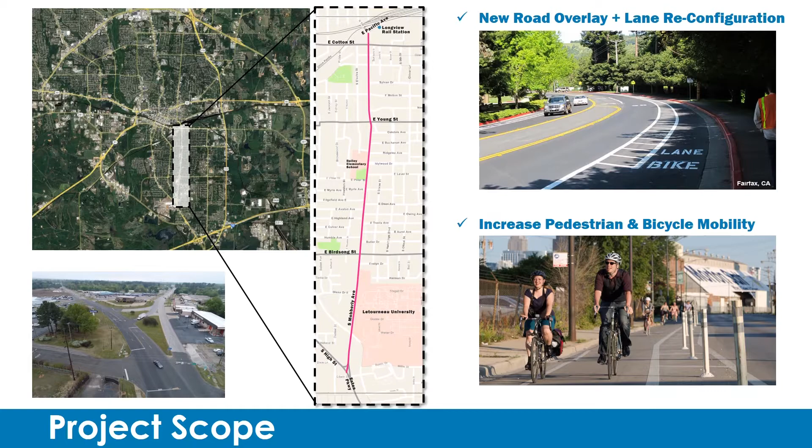The whole purpose of this is to make sure that we are creating a road that is safe, that is more pedestrian friendly, that is more walkable. So those are our project goals.

This has been a long time coming. If you haven't known that, this is a project that has been in the works for quite some time now. Back in 2014, Kevin over here, one of my colleagues with Freese and Nichols, who's going to be talking about some components of this, he actually did a pedestrian access study looking at how to improve the pedestrian access, particularly with the transit centers in those areas.

Again, I was lucky enough to work on the comprehensive plan back in 2015, which was a guiding plan that the city did, quite a large effort.

We followed that with a small area plan that specifically focused on South Longview. One of the real key things that came out of the comprehensive plan was that South Longview needs a little love and attention. We've seen a lot of growth going to the north, but we really need to do some things in this area. So that was a real key focus that came out of that, and a significant thing that helped lead us to how do we improve this area and the infrastructure to hopefully encourage new investment going forward.

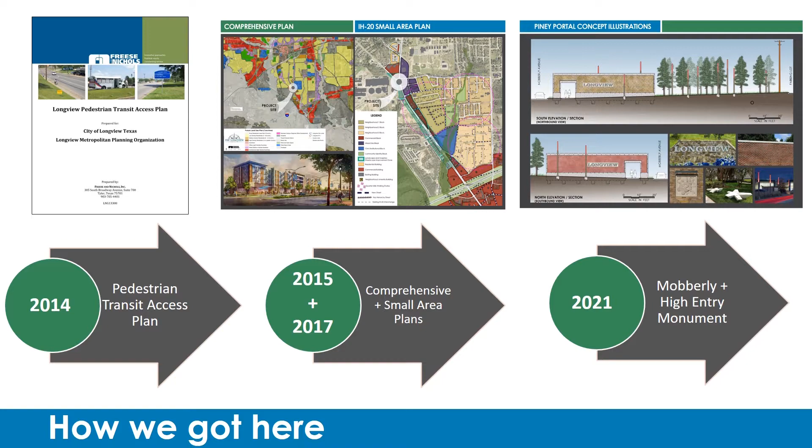And then the other project that also came out of this small area plan was a new entryway. So it's not there yet, but it is designed. Hopefully by the end of the year, the design will be complete and all the hurdles that we've got to go through to do that.

And then next year, you will start to see a new entryway right at where High and Mobberly meet. There's going to be a great new sign that goes there and a little reconfiguration of that roadway. So again, there's exciting projects underway that are coming.

And then also, additionally, you passed a bond. You as citizens of Longview passed a bond to put forward this as a project to be able to complete. The good news is that the funding is already there. We've already approved it, so yes, this is going to happen.

We are going to make this a better street, and that is going to be moving forward. We've also helped the city apply for a TxDOT grant, and so that will allow for some additional dollars if we're so lucky to get that, to be able to do some improvements.

So while I mentioned this project has been going on for a while, we are at the beginning stages tonight of actually designing this roadway. There are 2 meetings that will get that early input, and then we'll have some meetings throughout the construction. The actual construction of the roadway is probably 2 years away. We're going to be in design for the next couple of years and doing all the work that we need to do. So it might be 2 years away, but it is the time to make sure we're giving input now as we move forward with those designs.

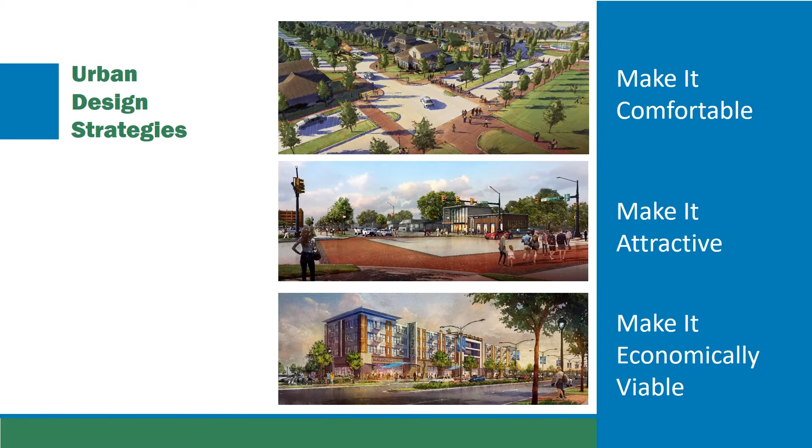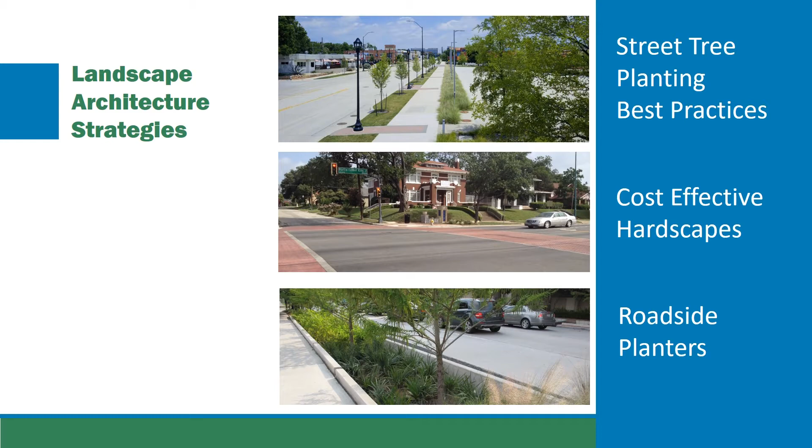The purpose of this is to make it comfortable, to make it attractive, to make it economically viable and encourage new development, and then also just to make it safe, looking at landscape opportunities, to make it green, to make it pretty, to look at those things that enhance this corridor from different planting options.

So when we look at the project goals, there's a lot of things that have come to mind as we've been hearing about this project: making it walkable, making it more of a destination, looking at art or safety enhancements, and hoping that we can ready this for economic development and make it sustainable.

So with that, you're going to hear the term complete street a lot. That is really our goal. Kevin is one of the complete street experts. He goes around the country talking about complete streets, so I'm going to let him come talk about what that is.

Thank you, Wendy. All right, so what are complete streets? Why do we do a complete street? What do we think of it? The beginning of the impetus for complete streets is the fact that we have focused so much on traffic, and moving traffic efficiently and effectively, that we've forgotten about the other road users, the bicyclists and the pedestrians. So we go back now and revisit the investments we have in our roadway infrastructure and see if there's some kind of balance that can be struck with what we have versus what we need.

We look at the roadways, and we look at a 5-lane road like we have here on Mobberly, and we think, do we really need 2 lanes each direction with a center turn lane, or can we do something with a little bit less, introduce bicycle-friendly bike lanes, enhance the sidewalk provisions, and make this more of a balanced corridor that is usable by everybody.

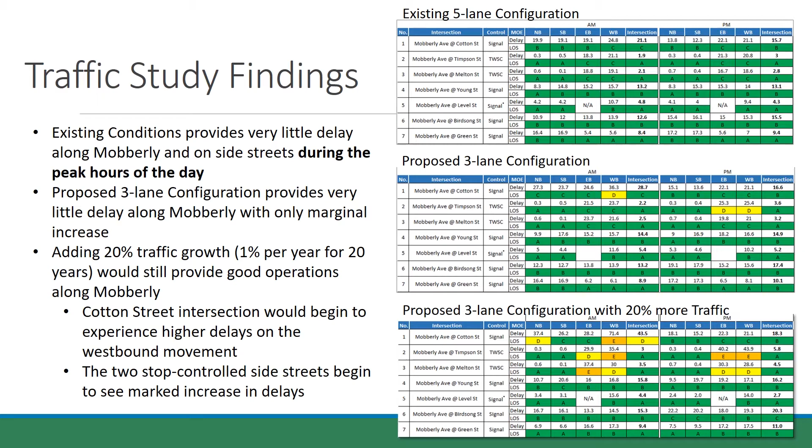So we ran our traffic models. You don't need to know everything about what's going on here, just understand that green means it's operating quite well, for both peak PM and AM conditions. In the peak hours right now, with the existing 5-lane configuration, we have very good operations, pretty much free flow and uncongested. When we go down to the 3-lane configuration, it's still operating pretty well, with very good operations north and southbound on Mobberly. There are a few side streets that have a right-turn need greater than what we provided, so we're going to look at those in design. But in general, the 3-lane configuration shows pretty much all green operations.

It's very good operations. We then tested: what if we had 20% more traffic, growing 1% a year for 20 years? Would we still be operating okay? We started to notice some side streets that aren't signalized now might start having challenges getting out into the traffic flow. That's an indication that in the future we might want a traffic signal at some current side street stop areas, such as Melton and Timpson streets. So we are looking ahead, making sure we don't cut off our nose to spite our face, and don't develop something we can't live with later. We're making that determination now before we even start looking at the alternatives to proceed with. That was an important stage to prove the concept we're moving forward with.

Here's an image of what that condition might look like. We're going to leave the curb lines basically where they are. We'd take the right outside lane and stripe off a bike lane, with a buffer space between the travel lane and the bike lane, typically 5 feet. If we come into a situation where those dimensions need to change a bit, we have that flexibility.

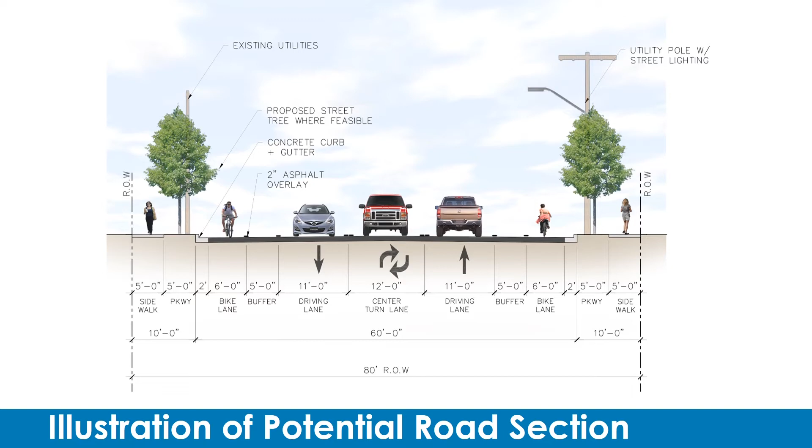And then we would enhance the pedestrian zone, the area outside of the curb, with an improved sidewalk 4 to 5 feet wide, plus about a 5-foot parkway buffer with landscaping and lighting and things like that may go in that space. So that would be the general concept for what the street might look like.

Now, we're going to have to take this block by block all the way down this corridor, this 2-mile-long corridor, because every block is going to have its own unique conditions, driveways, bus stops, things like that. When we come into a bus stop, the bus will be able to go into that buffered bike lane to serve its stop, then come out and get back in the travel lane. That's one of the typical things we'll have to deal with up this corridor.

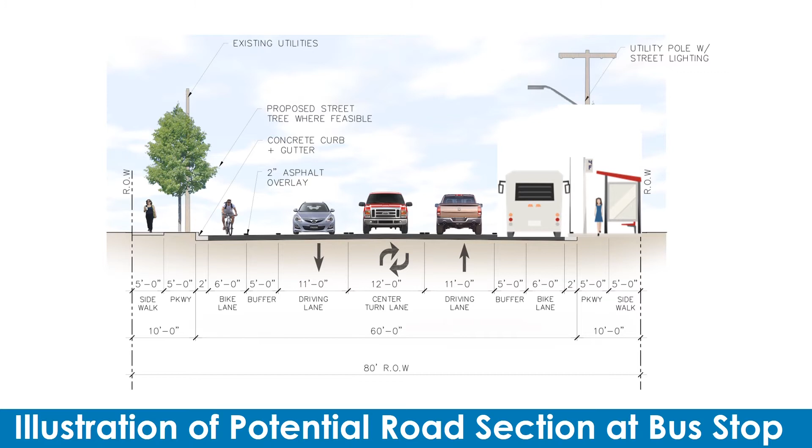We may have some driveways that need to have their own pullover right turn lane. We may have some street intersections that want a dedicated right turn lane just for capacity and to allow those cars to slow down as through traffic passes by. So the use of that buffered bike lane area will change block by block all the way down the corridor, but that is the generalized treatment we're going to be looking at.

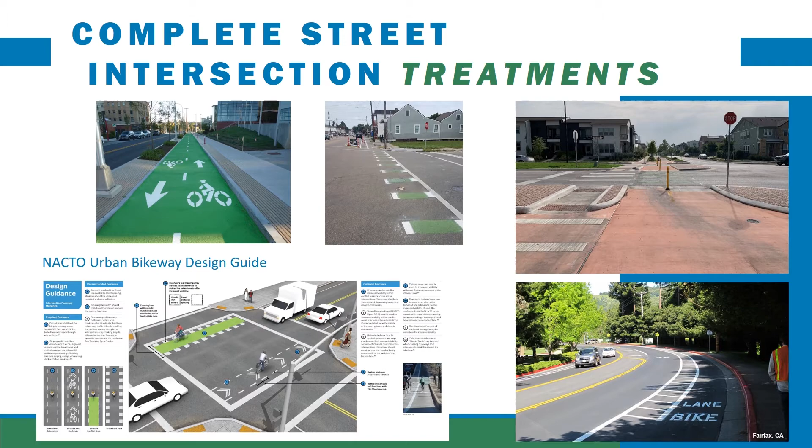And then as the bike lane passes through intersections, there will be all sorts of customized treatments for striping and signage as we go through. There's this National Association of City Transportation Officials Urban Bikeway Design Guide that has all sorts of examples of things we can do and how we can treat the bikeway through the intersection, even to the extent of maybe merging them together at the intersection, where the bike lane becomes part of the sidewalk element and moves back into the bike lane, just for the right turning elements and things to go around.

So a lot of ways we'll be looking at the elements to make sure they work, and that's the most important thing. We're going to try to do some testing out in the field to show and tell some of the things we might think about doing, but that's later on in early next year.

So potential parking regulation - we've got a lot of places that right now are using this public right-of-way to park in and do their upfront business. We've been having discussions with individual property owners about generally what we're trying to do, and most of them are very favorable to the concept we're trying to go after. But we'll have a chance to talk with you further if you have specific questions about a particular site.

And the individual driveways, intersection capacity is a major concern for me - I'm a traffic engineer, so I want to make sure that roadway is going to work. And then considerations for Laterno and any special events that might be going on, maybe having a dedicated right turn lane at Laterno, then picking up things past there with the buffered bike lanes down the street. Transitions up at High Street and how that whole thing will work. So a lot of details yet to work out, and we'll be sharing those with you as we get them further down design.

And there's just some more information about the fact that we're actively going out and talking with folks about what the thing might look like. We're actually bringing some kind of sample concepts out to them, so they can understand what's going on.

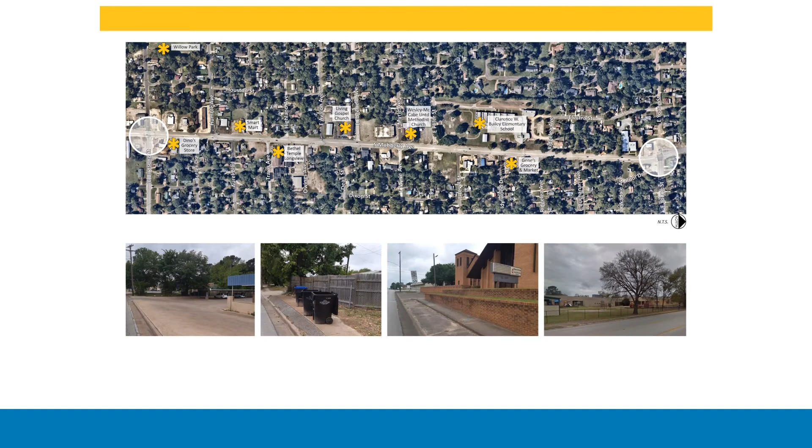Going through different sites, I won't go through all of this. You all know the corridor pretty well, but that's definitely something the design team is doing, looking at each of these sites and how it's affected, and how we can take some of those big businesses and opportunities and lay this in along the street.

So we're just kind of moving down and looking at an area that is more residential. You've got a lot of schools, a lot of churches, and then even in the historic area there are some real challenges because of the buildings. In some places you've got a lot of room along Mobberly, big setbacks, and in other places they're very, very short — houses and businesses come right up to the road. So there are different conditions along this roadway, and moving on closer into the downtown area. We'll be considering all of that as we go into this.

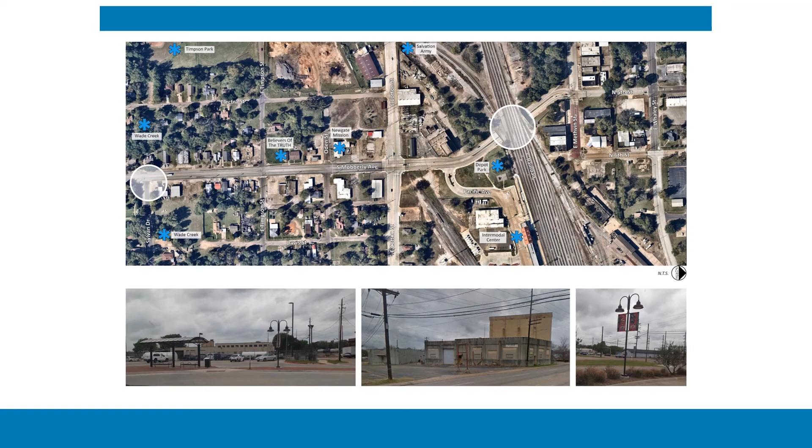So what's really important to us is what's important to you. We want to hear from each and every one of you sitting in this room, and anybody who's watching online. We want to be able to get your input.